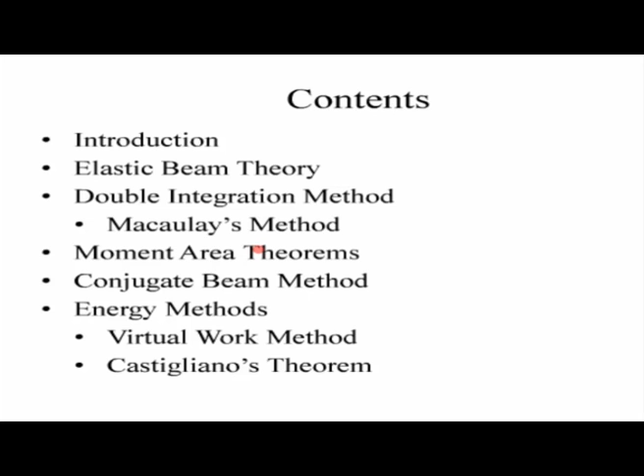Now, moving on with the introduction of this topic: why do we need to calculate structural deflections? Most often when we design structures, the first thing that comes to mind is the strength of the structure, whether it is adequate. But in addition to paying attention to strength, it is also important to calculate the deflections.

There are various reasons deflections can occur in structures. Mainly, due to loads, structures will deflect because no structure is practically or completely rigid. In addition to loads, deflections might be due to temperature changes in structural members, fabrication errors, or settlement of structural supports. These are the various reasons due to which a structure might undergo deflections.

In order to ensure that our structure is stable and the integrity of the structure is maintained, we need to be able to calculate the deflections of these structures.

There are various other reasons we need to calculate deflections of structures. A number of structural materials, such as concrete, which are mostly used for civil engineering structures, are brittle, and hence fail without giving much warning. It is therefore necessary to prevent damage to these materials, and to do that, it is also necessary to calculate the deflection of such structures.

Regarding serviceability, you need to avoid excessive deflections and vibrations in structures, because it will render the occupants or users of those structures unsafe.

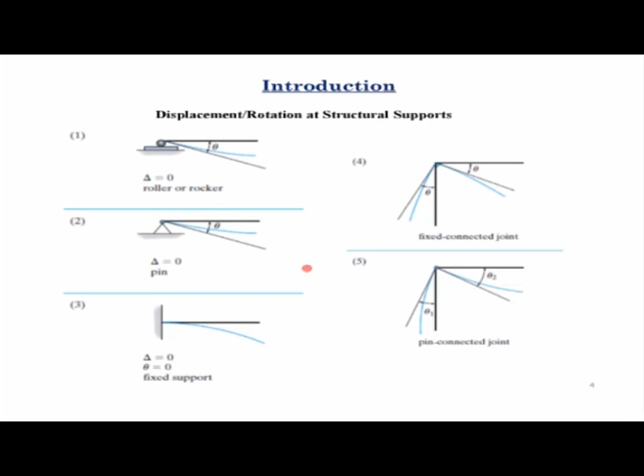Now, in order to calculate the deflections, displacements, or rotations in structures, we need to be familiar with the various kinds of supports that these structures have. Some of the typical support conditions encountered in common civil engineering structures are shown on this slide. The first one is a roller or rocker support, which restrains the movement or displacement of the structure in only one direction, perpendicular to the support.

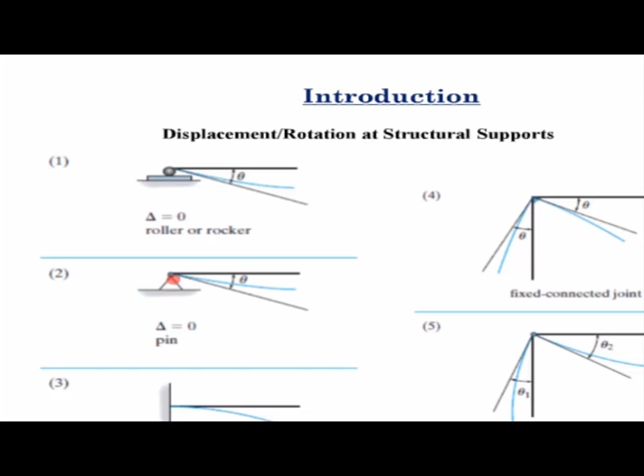The second one shown on this slide is a pin support, which restrains the displacement of the structure at that point in all three directions.

The third support condition most commonly encountered in civil engineering structures is called a fixed support, which restrains the displacement as well as rotations at those supports.

The fourth one shown here is a fixed joint connection, normally common in a frame member. In a fixed joint connection, the rotation of the two members connected at those joints are equal. In other words, displacement at those joints is allowed, but the rotations of those two members are equal. Finally, the last connection encountered in civil engineering structures are pin connected joints.

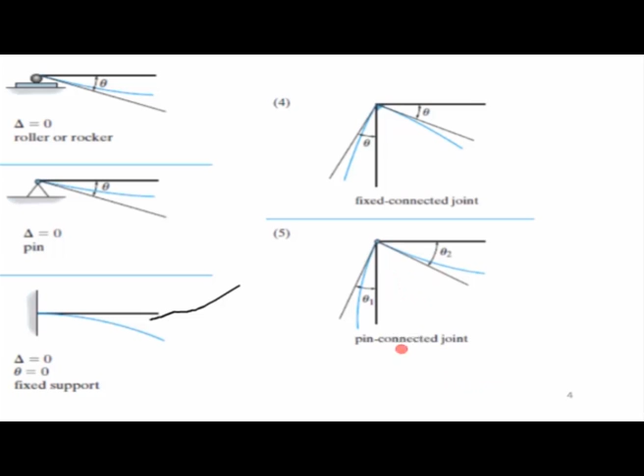In this kind of joint, the members are independent and free to move irrespective of the rotation or deformation of the other member. The two members connected are free to move by themselves.

Before I start with the first method of calculating deflection, I would like to give a small background about the elastic beam theory, based on which the first method, the double integration method, is developed. If you've taken classes on strength of materials or solid mechanics, you'll be familiar with this elastic beam theory, but I'll quickly recap.

However, it has been noticed that for members like structural beams, where the span to depth ratio is much higher - in other words, the length is much greater than the depth - the deflections are primarily caused due to the bending internal forces, or the internal bending moments.

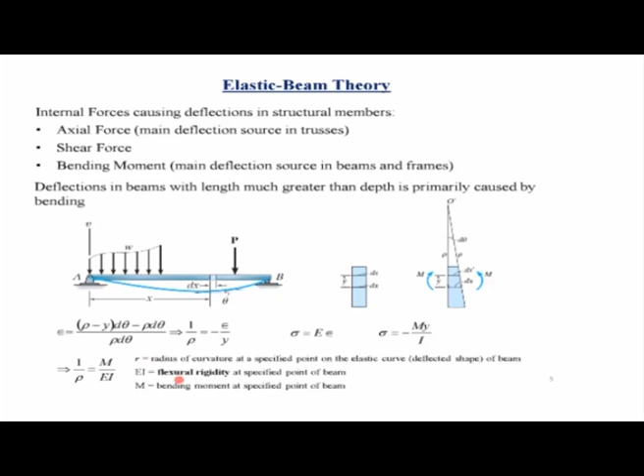Once again, if we look back at that relationship, 1 by rho is equal to m by EI. Now, this dx is the length or width of that element, and that can be written as the radius of curvature times d theta. So here we have replaced 1 by rho with d theta by dx, and taken this dx to the other side. So what you get is d theta equal to m over EI into dx.

Now if you remember from your geometry learnt in class 12, the radius of curvature is given by the second derivative of v with respect to x, over 1 plus dv/dx squared, whole to the power 3 by 2. In this study we are considering small deformations, where dv/dx is basically the rotation of the beam element. For small rotations, dv/dx squared is much less than 1, so 1 plus dv/dx squared is almost equal to 1. So we can say 1 by rho equals the second derivative of v with respect to x. Substituting this, we get m by EI is equal to that second derivative of v.

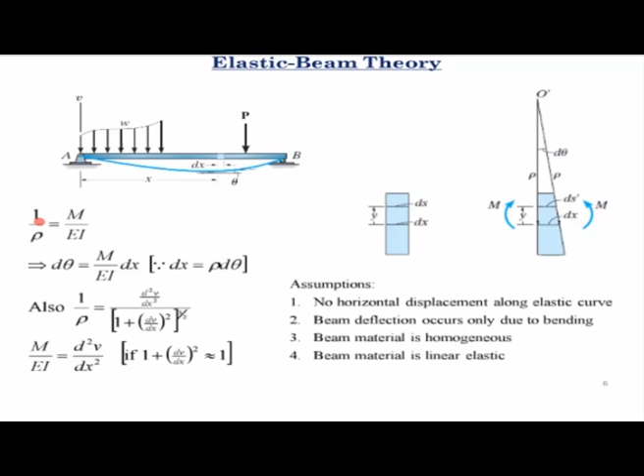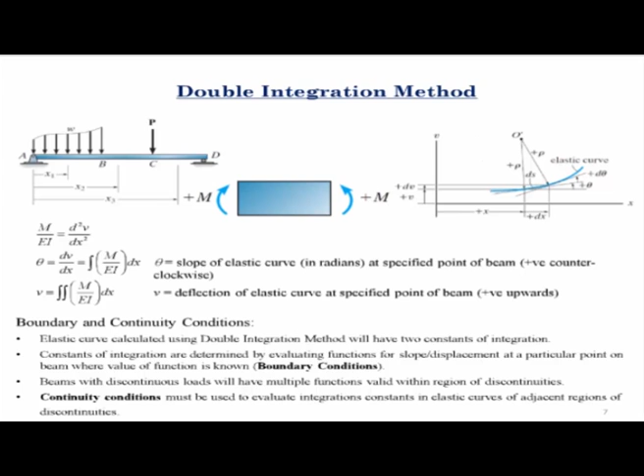So now we come to the double integration method, which is the first method for calculating deflection of structural members that I will discuss today. As I mentioned, the starting point of this method is the second order differential equation we developed in the previous slide: m by EI is equal to the second derivative of the displacement v with respect to the distance along the length of the beam.

Now if you integrate both sides of this equation, you get dv/dx is equal to the integral of m by EI, where dv/dx is the slope of the beam at any section. If you integrate both sides again, you get v, so integration of dv/dx is v, and you get the double integration of m by EI. So this is the basic principle in this method, where you integrate the m by EI function of the beam twice to get the deflection, and once to get the slope, theta, at any section.

Theta is the slope of the elastic curve of the beam at any section, and v is the deflection. Before I proceed further, I'd like to draw your attention to the sign convention that we used in this method for specifying theta and v.

For the beam, we considered the distance towards the right as the positive x direction, and the deflection in the upward direction as the positive deflection v. For the rotation, if it is counterclockwise, in other words in the positive x direction with deflection towards positive v, then that rotation is considered positive. So this is the sign convention for the positive rotation, and the vertically upward direction is the sign for the positive deflection.

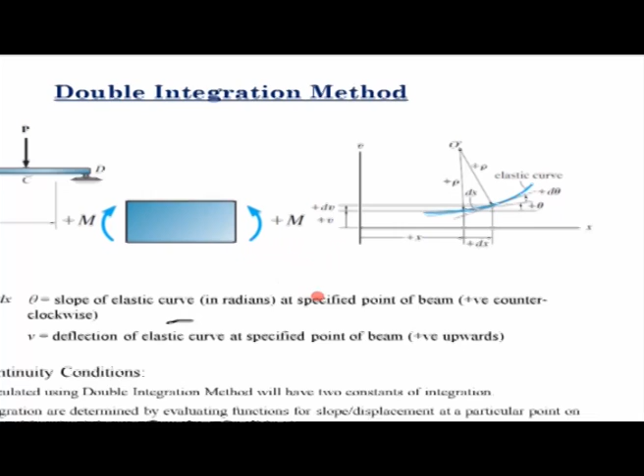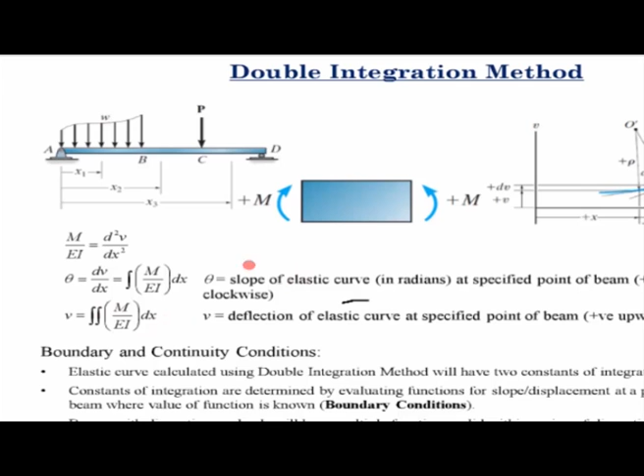Now coming back to the equation for this elastic curve, which is basically the deflected profile of the beam. We know that if we integrate this moment function of the beam, which is an expression in terms of x, where x is the distance from one end of the beam, we get some constant of integration on the right hand side. Those constants of integration have to be evaluated in order to calculate the deflection of the beam at any section, or to get the equation of that elastic curve.

So the elastic curve calculated using this double integration method will have two constants of integration. To determine these constants, we need to provide the values of either v or theta at some known points on the beam. These are known as the boundary conditions.

Beams with discontinuous loads will have multiple functions which are valid within the range of discontinuities, and continuity conditions in that case must be used to evaluate the integration constants in the elastic curves of adjacent discontinuities. I'll have two examples to show after this, and once we go through those, these four sentences would be a lot more clear.

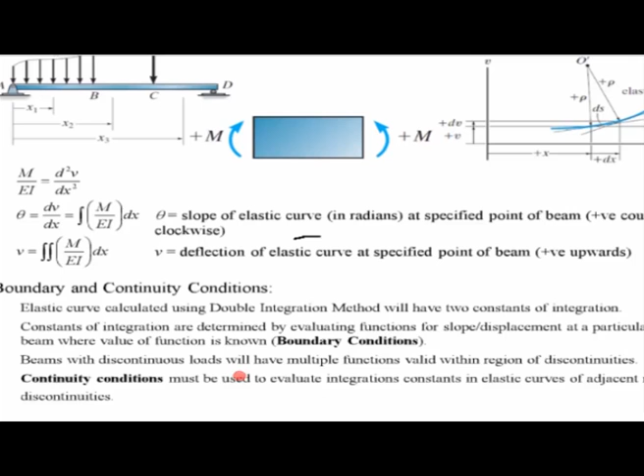This is the first example. It has a simply supported beam subjected to an external moment m0 at one of its ends. For the beam loaded as shown in the figure below, determine the equation of the elastic curve using the double integration method. Also determine the values of the maximum deflection and maximum slope of the beam, and the locations at which they occur.

One of the prerequisites for this talk was that the audience should be familiar with bending moment, shear force, and axial force diagrams of structures. So if any structure and loading is given, you should be able to draw these diagrams. We'll now go ahead with the solution of this problem.

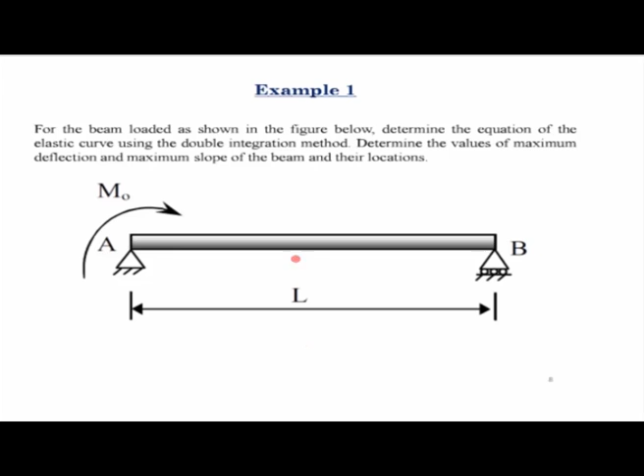If you draw the bending moment diagram of this beam, it will have a moment of m0 at end A, and at end B, which is a roller support, the moment is zero. So this is the bending moment diagram, and the moment function of the beam at a distance x from the left end is given by m0 times (1 minus x over L).

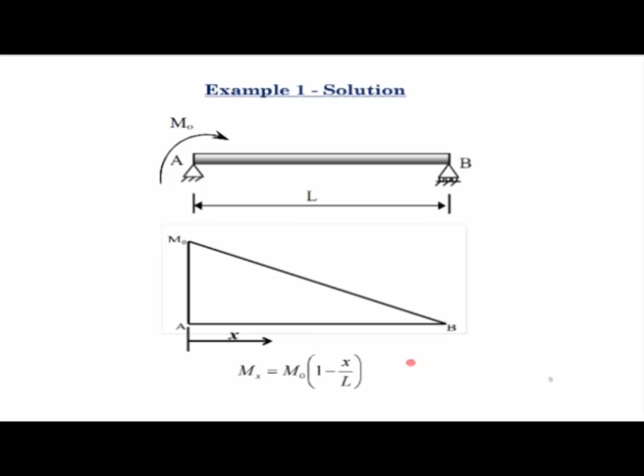To calculate the equation of the elastic curve, the displacement function at distance x, using the double integration method we write d2v/dx squared equals m/EI, and we replace m with m0(1 minus x/L). Integrating both sides, we get dv/dx on the left hand side, and on the right hand side we get (m0/EI)(x minus x squared/2L), plus a constant of integration C1.

If you integrate it one more time, you get v equals (m0/EI)(x squared/2 minus x cubed/6L) plus C1x plus C2. These are the two constants of integration that I was talking about in the previous slide. So whenever you solve for the deflection function of a beam using the double integration method, you will always encounter these constants of integration, which you have to solve using the boundary conditions.

Now for the boundary condition of this beam, it was a simply supported beam, so the deflections at both ends should be 0. So at x is equal to 0, the deflection, that is v, is equal to 0. If you put this into the last equation, putting v equal to 0 at x equal to 0, you will get C2 is equal to 0.

The second boundary condition for this beam was at the other end, end B, the deflection is 0. So at x is equal to L, v is equal to 0. If you come back to this equation, put x equal to L on the right hand side and set v equal to 0, and solve it, you will get C1 is equal to minus m0L over 3EI.

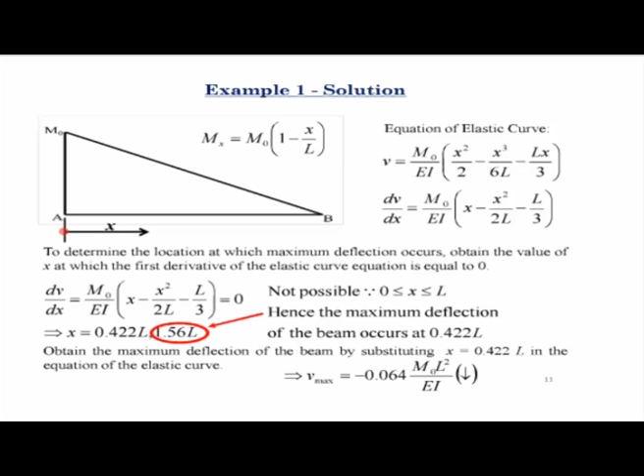So that is about the deflection, the maximum deflection of the beam. It is minus 0.064 m0 L square by EI. The minus indicates it's in the downward direction, and this maximum deflection will occur at a distance of 0.422 L from the left end of the beam.

Now for the maximum slope, what we do is we take the derivative of dv/dx, we take the double derivative, so it is d2v/dx square. If you equate that second derivative to 0, you will get x is equal to L. Now if you put x is equal to L in this equation, you get the slope is m0 L by 6 EI. So that is the slope at the beam at x equal to L.

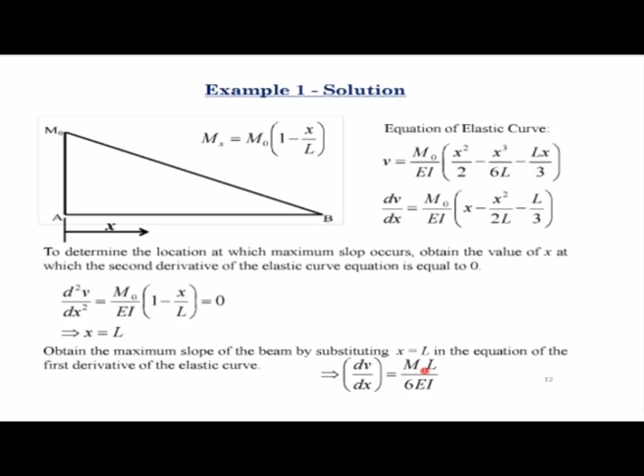But there is one thing that you should be careful about, which is one of the drawbacks of the double integration method. You cannot always take the higher order derivative, equate it to 0, and get the location of the maximum slope or deflection. In this case, what you get is a positive rotation at the right end, at x equal to L, which is m0 L by 6 EI. However, if you come back to this equation for the slope of the beam, which is dv/dx equal to...

m0 by EI times x minus x square by 2L minus L by 3. In this equation, if you put x equal to 0, that means at end A of the beam, you will see that dv/dx at x equal to 0 is minus m0 L by 3 EI.

So what does this indicate? This indicates that at this end, it is having a negative slope, meaning it is in the clockwise direction at this end. Notice that the magnitude of this slope at the left end is higher than the magnitude of the slope at the right end. So this is basically to remind you that you should always calculate the deflection at the support condition in addition to the deflections or rotations that you get from the equation of the elastic curve.

In order to calculate the maximum deflection, in addition to taking the higher order derivative equal to 0, you should also pay attention to the deflections at the supports. So in this case, the maximum rotation of the beam will be at the left end, which is minus m0 L by 3 EI, and the minus here indicates it is in the clockwise direction.

So just to stress on that point, the maximum positive slope of the beam occurs at x equal to L. However, the maximum negative slope of the beam occurs at x equal to 0, which is not obtained by equating the second derivative of the elastic curve equation to 0. In this case, the maximum absolute value of the slope is at x equal to 0. So at x equal to 0, the value of the slope is m0 L by 3 EI in the clockwise direction, and that's the maximum slope of the beam in this case.

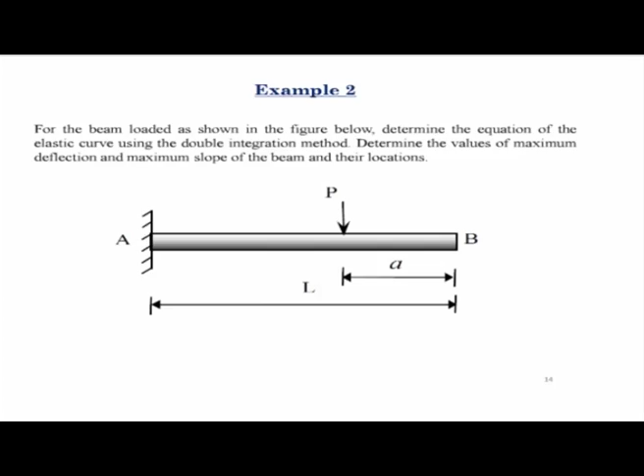Now in this case, if you draw the bending moment diagram of the beam, this is what it will look like. At the fixed end, the moment is minus P times L minus A, and at a distance of L minus A from the left end, the moment is 0, and beyond that, the moment remains constant. So this is the bending moment diagram.

So now notice that the bending moment, if you write the moment function, it will have two equations. For x between 0 to L minus A, it is minus P times L minus A minus x. And when x is greater than L minus A and less than L, the moment is equal to 0.

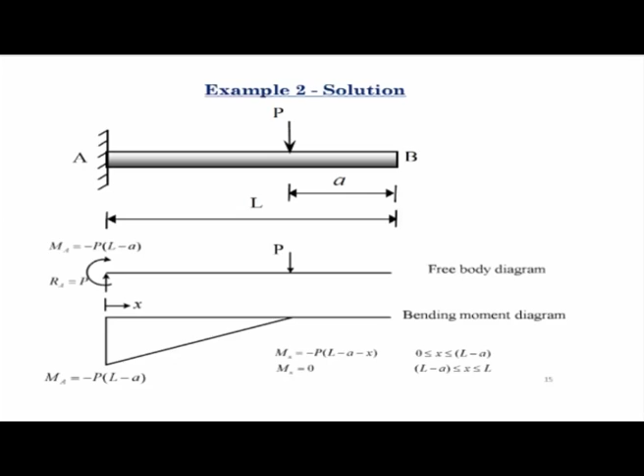Now, to solve for the elastic curve of this beam using the double integration method, there are two sets of moment functions that we have to consider. One is valid for x greater than 0 and less than L minus A, and the other one for x greater than L minus A and less than L.

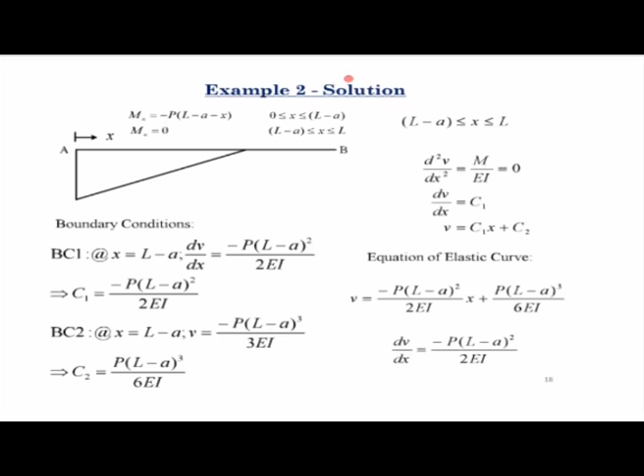In this problem we also had to calculate the maximum slope and maximum deflection of the beam. To do this, look at the expressions for slope and deflection for x between 0 and L minus A — both contain terms of x. So if x is 0, the deflection is 0 and the slope is 0.

As you keep increasing the value of x, the deflection and slope keep increasing. So this gives the maximum value of slope and deflection at x equals L minus A, from these two equations. Now coming to the other two equations...

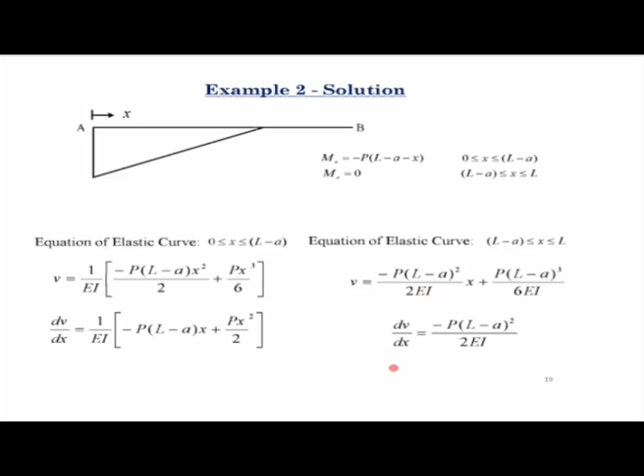So the maximum displacement and slope of the beam are obtained by putting x equal to L into those two equations. This gives the maximum slope, minus P(L minus A) squared over 2EI, and the maximum deflection, minus P(L minus A) squared over 6EI times (2L plus A). These are the maximum deflection and maximum slope at end B.

So these are the two examples that I wanted to discuss in this lecture.

Based on our observations from these two examples, I've highlighted some points about the double integration method to keep in mind. First, the double integration method can be used to directly obtain the slope and deflection at any point along the span of a beam from the equation of its elastic curve. If you have the moment function of a beam along its span, you can use it to calculate the slope or deflection at any point using this method.

However, there are some drawbacks, as I mentioned before. Beams with discontinuous loads will have separate moment functions applicable to individual regions of discontinuity. We saw in the second example that even though there was no moment function for the region between L minus A and L, we still had to consider a separate set of equations and find two separate constants of integration to get the equation of the elastic curve for the entire beam.

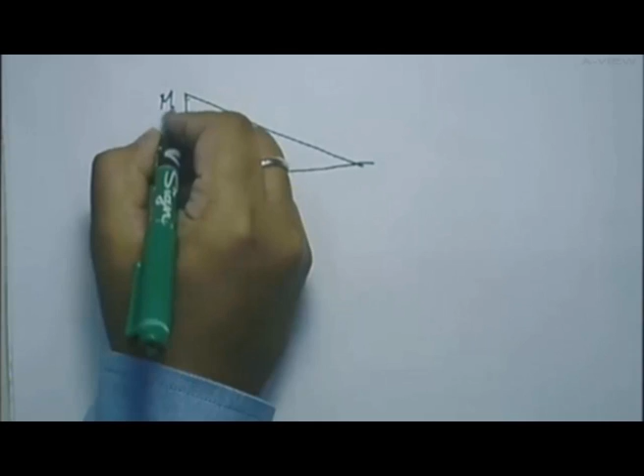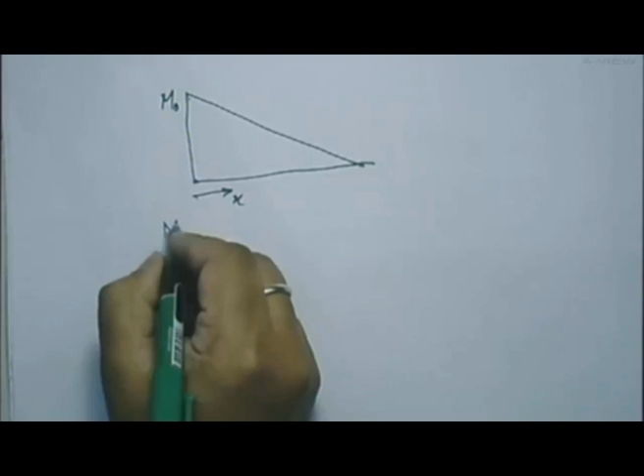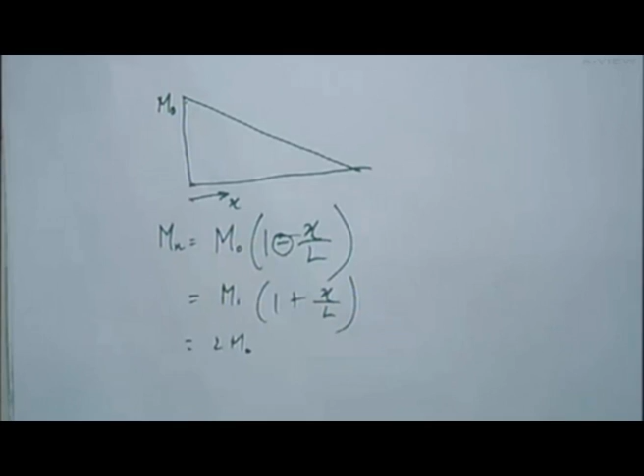Sir, in example number 1, we have mx equal to m naught times (1 minus x over L). Sir, I'm solving it and getting m naught times (1 plus x over L). Sir, why is there a minus sign? In example number 1, look at the bending moment diagram of that beam. This is the x-axis, and at x equal to 0, the value of the moment is m0, right? The equation I got is m(x) equal to m0 times (1 minus x over L). At x equal to L, the value of the moment is 0. If you put x equal to L, you get 1, so 1 minus 1 makes it equal to 0. Now if you say it is m0 times (1 plus x over L), then at x equal to L you would get 2m0, which is wrong since the moment is reducing to zero, it's a negative, so that's why you should have the negative sign there. Is that clear? Yes sir, I got the answer. Thank you, sir.

I got another question through the chat asking why we assume the beam is linearly elastic. The reason is that if we do not assume the beam to be linearly elastic, then in the equation d2v/dx square equal to m over EI, the E term is not a constant. So the equation we are using as the basis of our method would not be applicable. That is the main reason this method is applicable for linearly elastic materials or beams which are linearly elastic.

There's another question asking how to find slope and deflection for continuous beams. Before I started this lecture today, I mentioned this method is for statically determinate beams. So if you have a continuous beam which is statically determinate, and there is a support somewhere in between the span, you basically apply the support conditions at that point into the equation of the elastic curve to evaluate the constant of integration. So wherever the boundary condition is imposed, you apply it into the equation of the elastic curve, and you should be able to solve for the deflection and slope of that beam even though it is continuous.

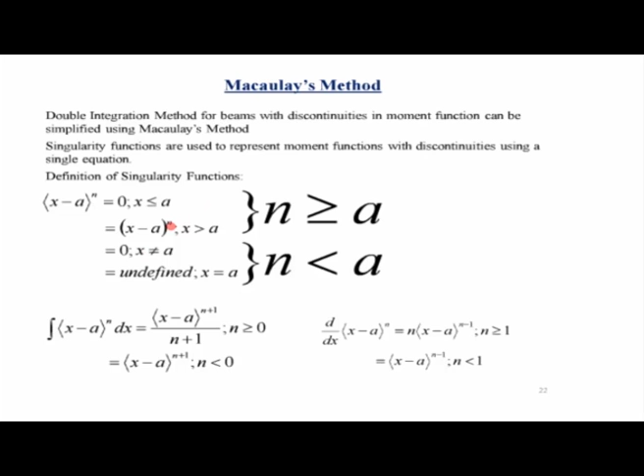We'll see the advantage of these properties of the singularity functions very quickly when we go through the example on the next slide. So this is the basic principle of Macaulay's method, where you apply the singularity function to represent the moment function of beams with discontinuous loadings by a single equation. Instead of using separate equations for each region having continuous loading, we'll use these singularity functions to represent the equations of the beam by a single equation.

So as an example for this method, I have taken this beam. If you look at this, you can see that it is supported here at A and D. So this is a free body diagram of the beam, and it has a concentrated load at this point B, and a uniform load of 450 Newtons per meter between points C and D.

Now, for your convenience, I have calculated the reactions. I'm sure that with simple equations of statics, you should be able to arrive at these reactions. That is, at the left end, the reaction is 480 newtons, and at the right end, the reaction is 920 newtons. Now, if you want to write the moment function for these beams, they have load discontinuities at point B and C.

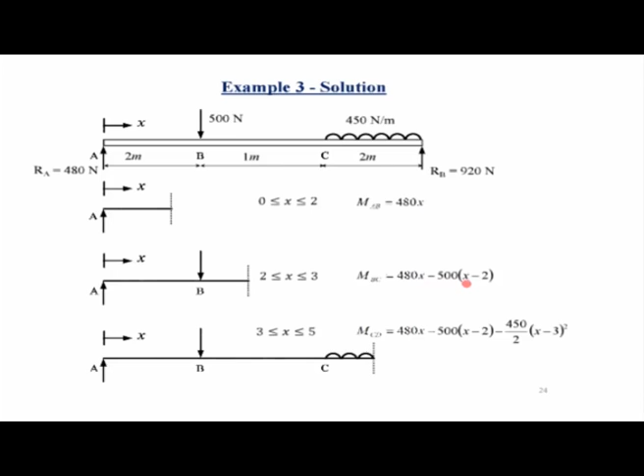So what happens is between A and B, there is one equation for the moment function. For x between 0 to 2 meters, the moment function is given by this reaction 480 times x. For this region between B and C, that is for x greater than 2 and less than 3, the moment function is given as 480x minus 500 times x minus 2. So that concentrated load, which is at a distance of 2, it comes into the picture here for the moment equation between B and C.

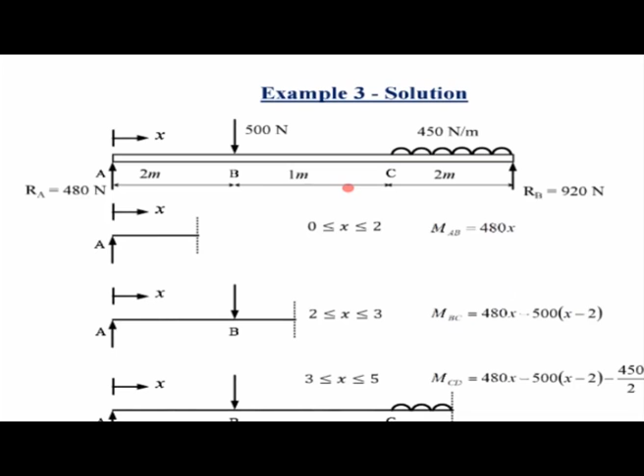Now, if you look at the third region, that is between C and D, the moment function is given as 480x minus 500 times x minus 2, minus 450 by 2 times x minus 3 whole square. So now in this region, even the uniformly distributed load of 450 Newton per meter comes into the picture.

So now you see that if you want to solve this by the regular double integration method, you will have 3 different sets of moment equations. You will have 6 constants of integration that you have to evaluate in order to be able to obtain the elastic curve of this beam. So now what we'll do is we'll see how we can solve it much easily using the step or singularity functions by the Macaulay's method. Yeah, this is the equation of that beam.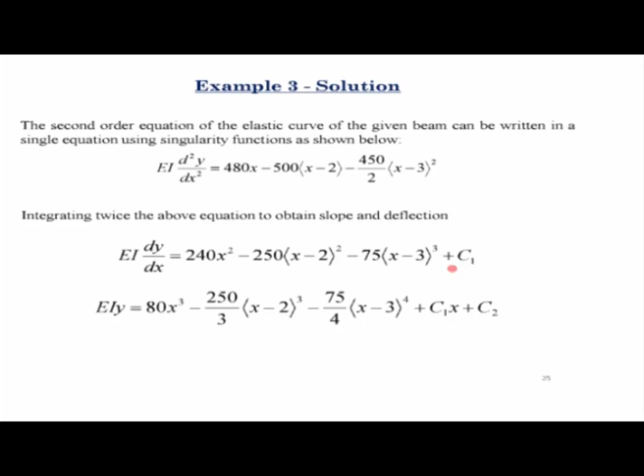So now what we have to do is solve for these constants of integration. So if you solve for this constant of integration, we'll have to look at the boundary conditions. Now this beam had restraints at the two ends.

So we say that at those two ends, the deflection is 0. So at x equal to 0, the deflection is 0. So if you put x equal to 0 on the right hand side here, all these terms will become 0, and put v equal to 0 here, you get C2 is equal to 0.

The second condition is at x is equal to L, in this case L is 5 meters, v is equal to 0. So put x equal to 5 here, so it will be 80 times 5 cube. Now here if you put 5, 5 is greater than 2, so this term will be present. So it will be 250 by 3, 5 minus 2 whole cube. Again here 5 is greater than 3, so it will be 75 by 4, 5 minus 3 whole to the power 4, plus C1 into 5, and C2 we got it as 0 here.

That will give you the value of C1 as - again there is a mistake here, it is minus 1490. So the value of this constant is minus 1490. So C2 is 0 and C1 is minus 1490.

So next thing you do, just like in the double integration method, you put these values back into this equation. If you put these values back here, this is what you will get: EI dv/dx is equal to 240x square minus 250(x minus 2) whole square minus 75(x minus 3) cube. Again, these are singularity functions, just keep it in mind. Again there's a typing error here, this should be minus 1490.

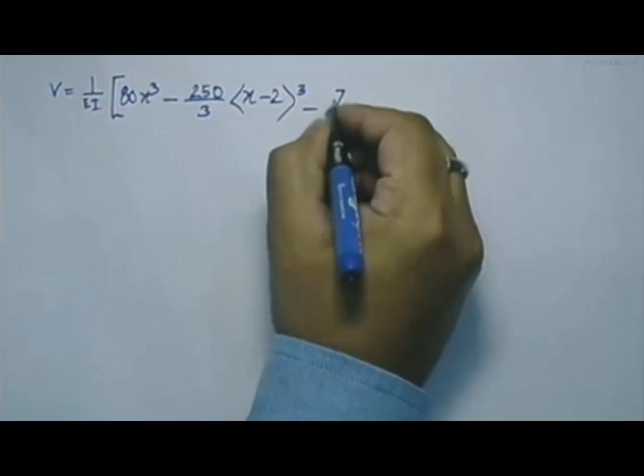80x cube minus 250 by 3, the singularity function of (x minus 2) whole cube, minus 75 by 4, singularity function of (x minus 3) to the power 4, minus 1490. So this is the equation of the elastic curve using the singularity function.

Now if I want to calculate the maximum deflection of that beam, I can say dv/dx, which is equal to 1 by EI, this will become 240x square minus 250(x minus 2) whole square minus 75... to the power... I'm sorry, there should be an x here, C1x minus 1490.

Now if you straight away equate this to 0, what happens to these singularity functions? You cannot just ignore them or take them for calculating the values of x. So what we have to do is, just like in the double integration method, separate it into 3 different regions.

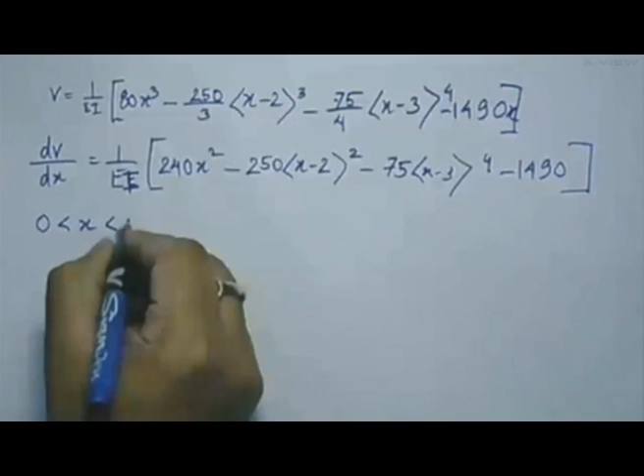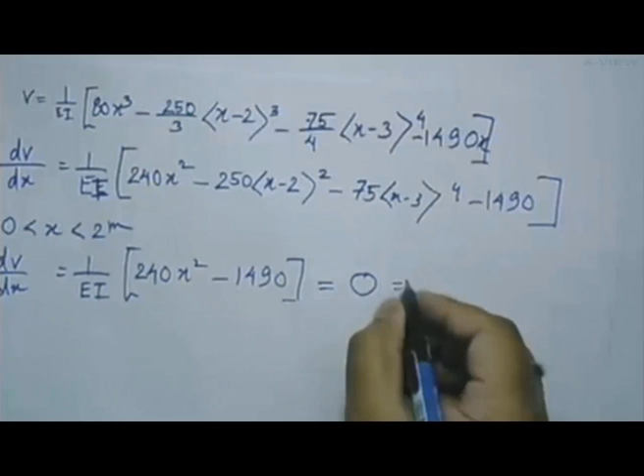So for x between 0 to 2 meters, the dv/dx will be 1 by EI times 240x square minus 1490. Now you equate this to 0 to get the location of the maximum deflection. If you equate this to 0, you will get x is equal to...

2.49 meters. Now, if you notice, this part of the equation I wrote is valid for x between 0 to 2, and by solving this, you are getting x is equal to 2.49. So it is not applicable at x is equal to 2.49. So the maximum value of the deflection cannot be obtained at x is equal to 2.49. In other words, the maximum deflection does not occur between x equal to 0 and x equal to 2. So now what we do is take the second equation.

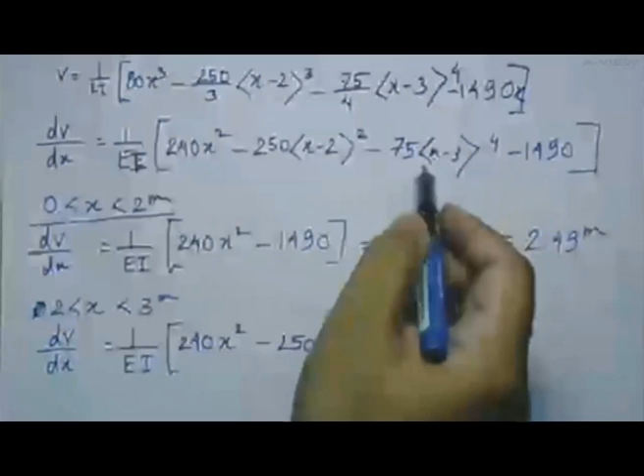So for x between 2 meters and 3 meters, dv/dx can be written as 1 by EI times 240x squared. Now the second term comes into the picture, minus 250. Since x is greater than 2, you can write it using the round bracket, so x minus 2 whole square.

Minus 1490 - this term is still not applicable, it's only applicable for x greater than 3. But right now x is between 2 and 3. Now if you put this to 0, you get a quadratic equation. If you expand the x minus 2 whole square and rewrite it, you get 1 by EI minus 10x squared plus 1000x minus 2490 equals 0. If you solve this, you end up with two values of x. This is a quadratic equation.

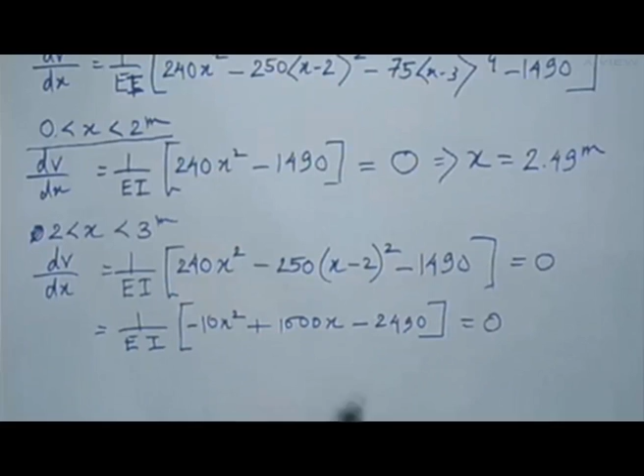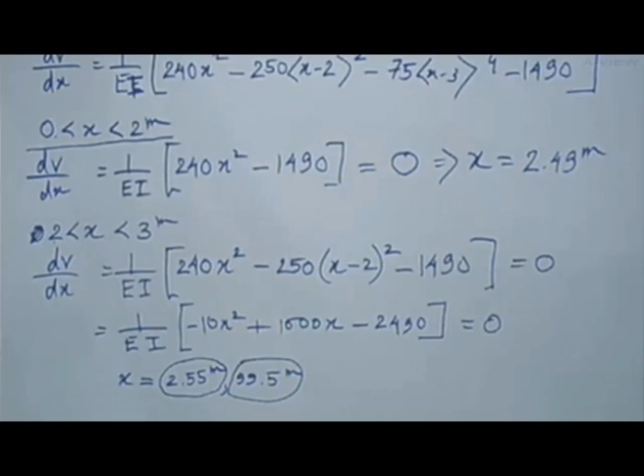I've just solved it for your convenience. So to solve this, you get x equal to 2.55 meters and 99.5 meters. Now this second value is not applicable, because for this equation the limits of application are between x equal to 2 and x equal to 3. The first solution, x equal to 2.55 meter, is between 2 and 3, so this solution of x is applicable in this equation.

So to calculate the maximum value of v, you put x equal to 2.55 meters, and solving it you end up with minus 2487 by EI. So from this you can see that this is one of the maximum values of the deflection. Now here you are getting a negative value - that tells you that the maximum deflection is in the downward direction.

Now this is the second set of equations. There will be another third set of equations valid for x greater than 3 and less than 5, and for that the equation will be dv/dx equal to 1 by EI times 240x squared minus 250 times x minus 2 whole square minus 75 times x minus 3 to the power 4, minus 1490. Notice that even this singularity function at x equal to 2 and the singularity function at x equal to 3, both of them come into the equation and both have been replaced by round brackets.

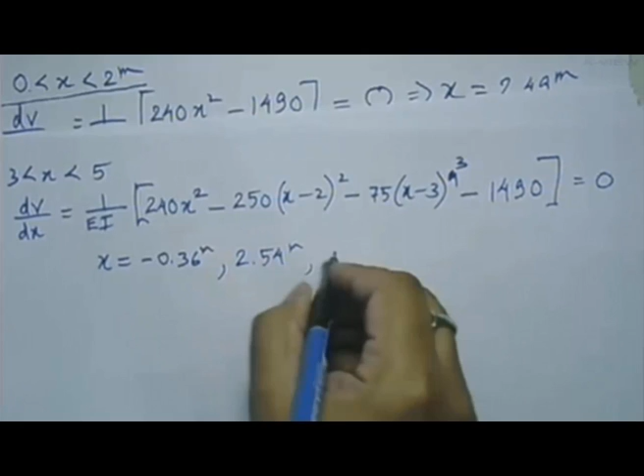So if you equate this to 0, this is a cubic equation. So if you solve this, you will get three values of x. The values you get are minus 0.36 meters, 2.54 meters, and 6.68 meters.

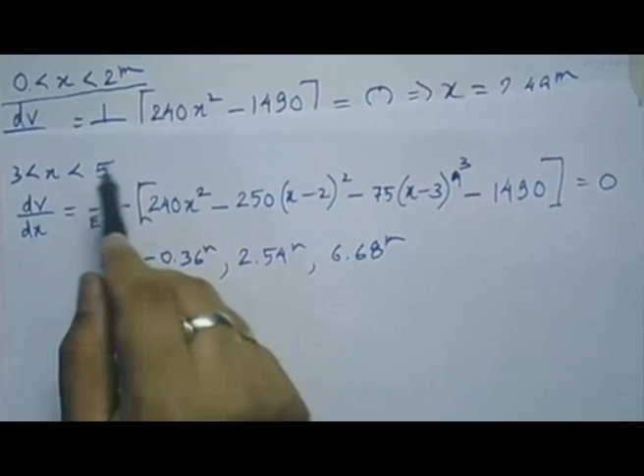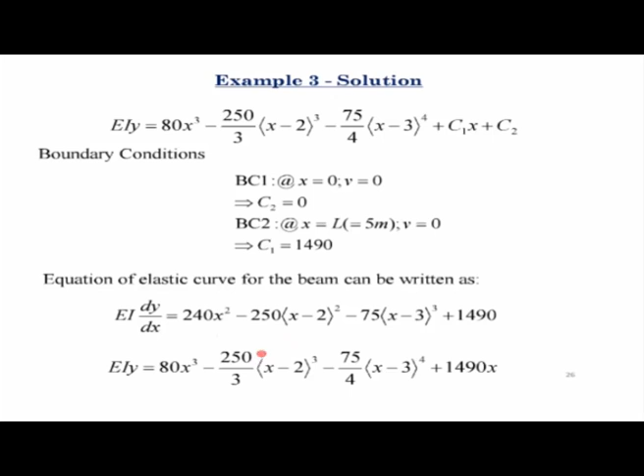So this is one example that I wanted to discuss with you all, to show some of the limitations. Even if you are able to obtain the equation of the elastic curve - that is the slope equation and the deflection equation - by solving a single equation, if you have to calculate the maximum slope or maximum deflection of the beam using this method, you will have to again consider separate equations applicable for each region of continuous loading, just like you do in the double integration method.

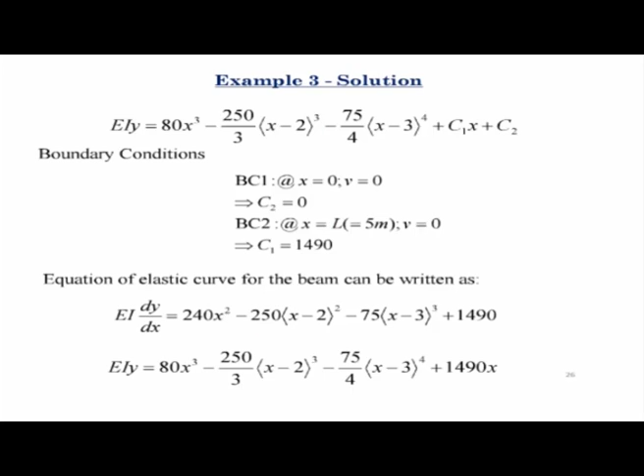So these are some of the highlights of Macaulay's method. First of all, it is used to directly obtain the equation of the elastic curve of a beam with discontinuous loads, using a single moment equation with singularity functions. Just like in example 3, if you had solved it using direct integration, you would have solved 3 different sets of equations and 6 constants of integration. But using Macaulay's method, you only had to solve one equation and 2 constants of integration. So it is definitely more convenient for calculating slope or deflection at any point over the span of a beam with discontinuous loads.

However, evaluation of maximum slope or deflection from the equation of the elastic curve requires consideration of separate equations without singularity functions. So as I showed in that example, to calculate the maximum deflection of the beam, you again have to consider 3 separate regions: one for x between 0 to 2, the other between 2 to 3, and the last one for 3 to 5.

Now again, just like the double integration method, this is not applicable for calculating slope or deflection of beams with complicated loading and support conditions, and also it is not applicable for members having significant deformations due to axial and shear forces. So that is all I had to present about Macaulay's method.

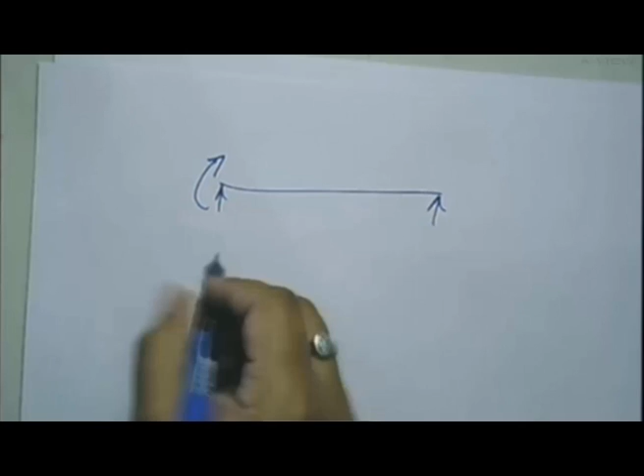a moment acting at the support. So if you draw the moment diagram of that beam, the moment function is continuous. There is no discontinuity. So in this case, I would say you don't even need Macaulay's method if I'm getting the question right. You just find the moment function or the moment equation over the length of the beam and then directly use it in the double integration method. You don't need to use Macaulay's method for this beam.

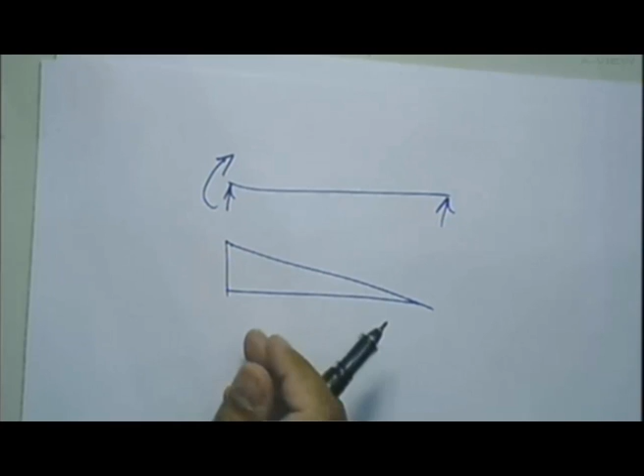Okay, the next question I got is, why can Macaulay's method not be used for member deformation due to axial force and shear load? Now, the basic principle behind Macaulay's method or the double integration method is the elastic beam theory, which basically considers the deformation of members due to bending moment, and does not consider the deformation of members due to axial force and shear load. So that is the reason why Macaulay's method or double integration method cannot be used for calculating member deformation due to axial load and shear forces.

The next question I have is, can we predict directly the approximate place of maximum deflection without undergoing all those individual sections? I'm not sure if you're asking about the example that I have discussed.

If it is about example 3 that I was talking about, yes, we can look at the beam and definitely say that the maximum deflection would be somewhere near that concentrated load. But to find the exact location and value of that maximum deflection, we need to go through the exercise where you take the first derivative, equate it to 0, find the location, and put it back into the equation of the elastic curve to get the maximum deflection.

How do you calculate the deflection and slope using Macaulay's method for a uniformly varying load? If you write the moment function of a beam with a uniformly varying load, you'll notice there is actually no discontinuity in the moment function. So basically, you do not need to use Macaulay's method for solving such a beam.

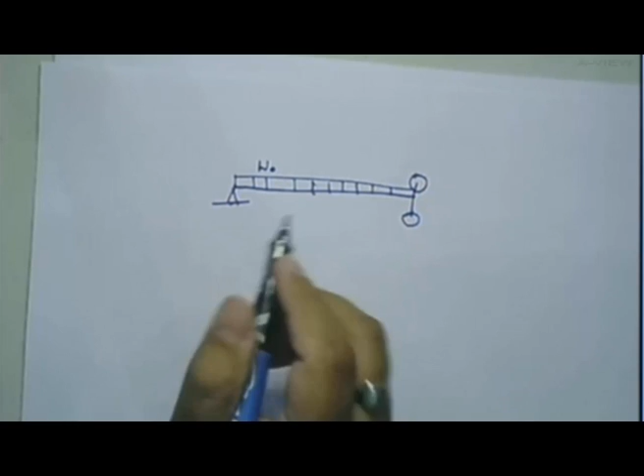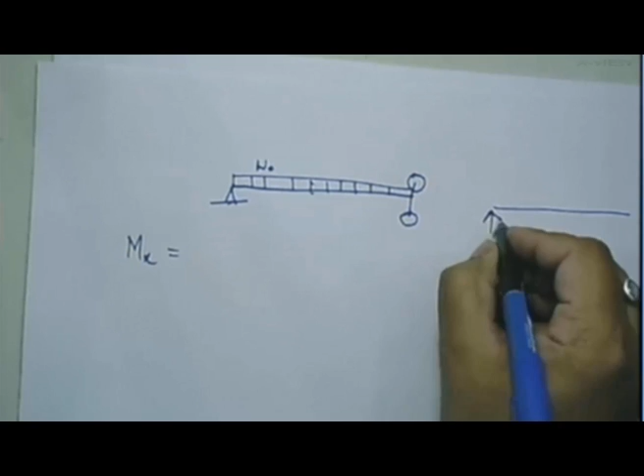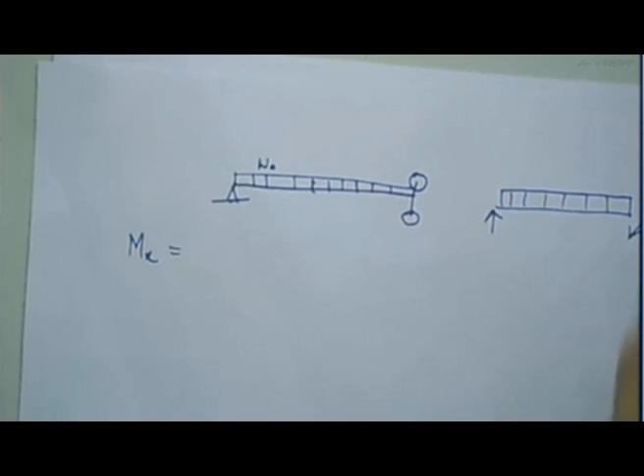So if you write the equation of the moment function, the first thing is to find the moment function. In order to do that, you should first draw the free body diagram. If you draw it, you'll get a reaction here, and a moment. Now this is w0, and this is the length of the beam.

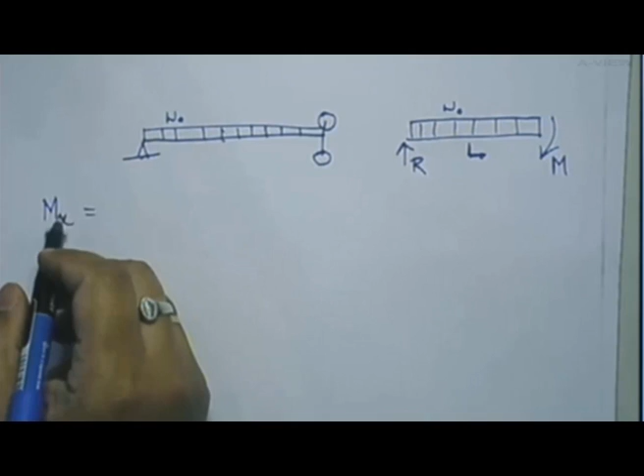So if you apply the equation of static equilibrium to this beam, saying the summation of vertical forces is equal to 0, you'll be able to solve for the reaction, which will be equal to omega 0 L, and the moment would be equal to omega 0 L square by 2.

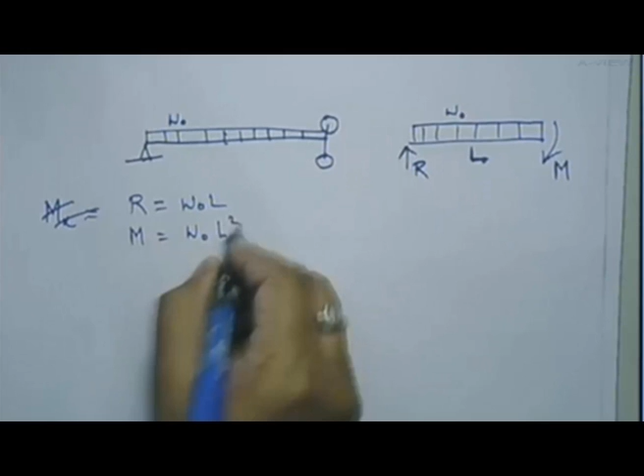Now, to solve this beam using the double integration method, you have to write the moment function. It will be R into x minus omega 0 L square, omega 0 x square by 2. So this is the moment function that you have to use.

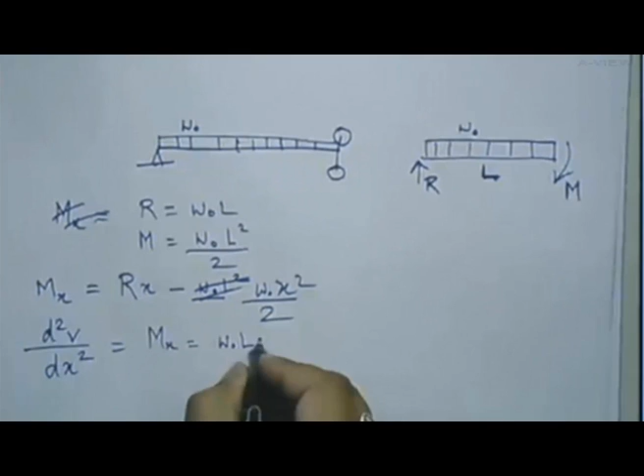Now you do the double integration, so you write d2v/dx square is equal to Mx. In this case, it is omega 0 L x minus omega 0 x square by 2. Now you can use the double integration method to get the expression—and what we've missed here is 1 by EI.

If you solve for this, you will get some expression in x, and you will get two constants of integration, C1 and C2. Now, how do you solve for C1 and C2?

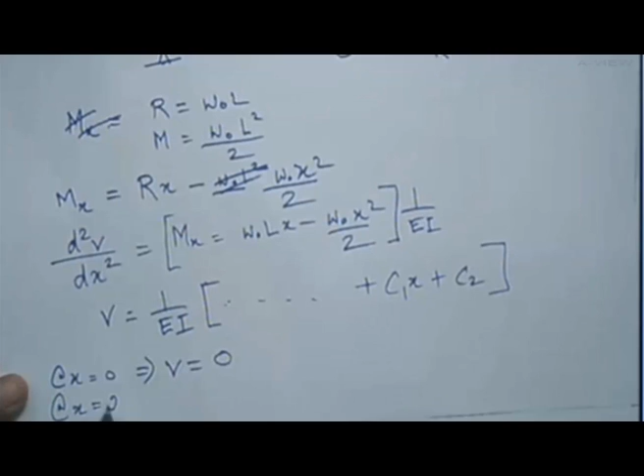What are the boundary conditions in this beam? In this beam, the boundary condition would be: at x equal to 0, V is equal to 0, because it's a roller support at the left end. And the second boundary condition would be at x equal to L, the slope of the beam would be 0.

If you look at this beam, here it can move vertically, but it is fixed into this rod. So because of that, it will not have any rotation at this end. So dV/dx is equal to 0.

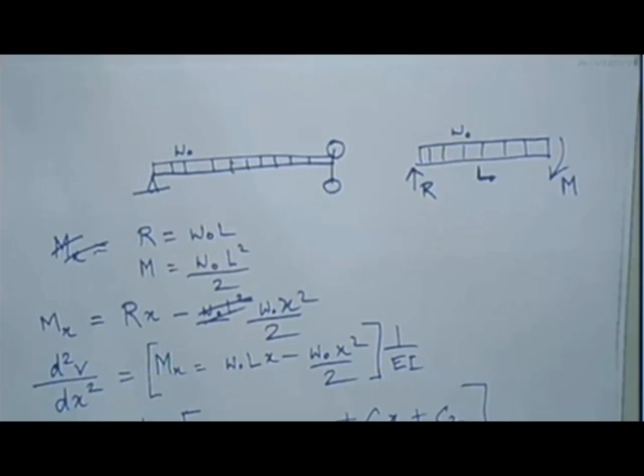Once you have these two boundary conditions, you apply them into the equation of the elastic curve, you will be able to calculate these two constants of integration, and thereby you will be able to get the equation of the elastic curve. So this is the first problem of the assignment.

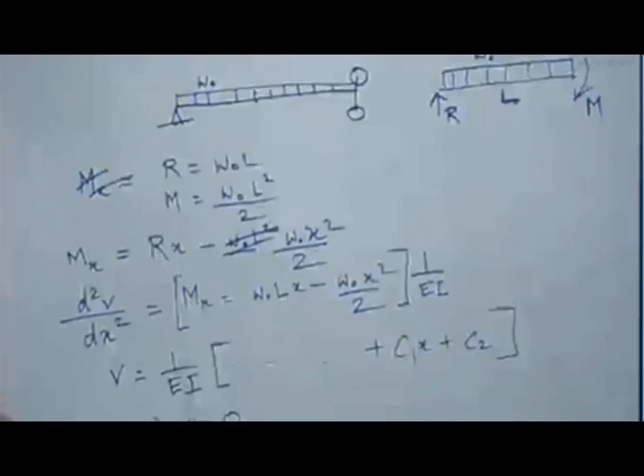So that was the first problem that I just discussed. Now there is the second problem, if you see there in the assignment. This is also answering a question that one of you all had. Determine the deflection at midpoint of the simply supported beam using Macaulay's method.

So you have a uniformly increasing load. From 0, it goes up to W at the center of the beam, and then it is again decreasing. So the question that somebody asked me is, what do we do if we have a uniformly increasing load?

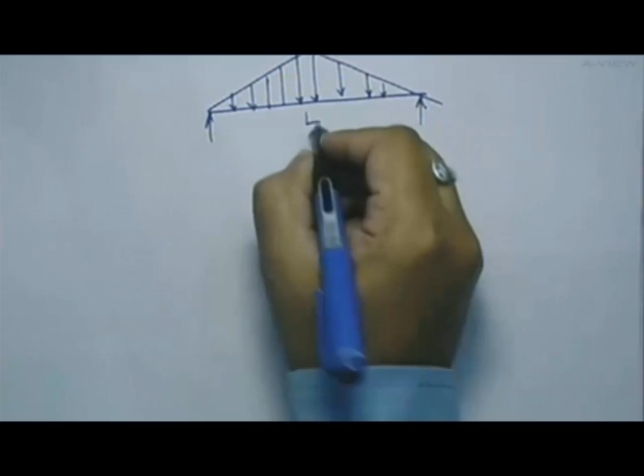So this is the uniformly increasing load. First thing you have to do is calculate the reaction. If the length is L, the total load on the beam is half omega times L. So the reaction at each of these supports would be omega L by 4.

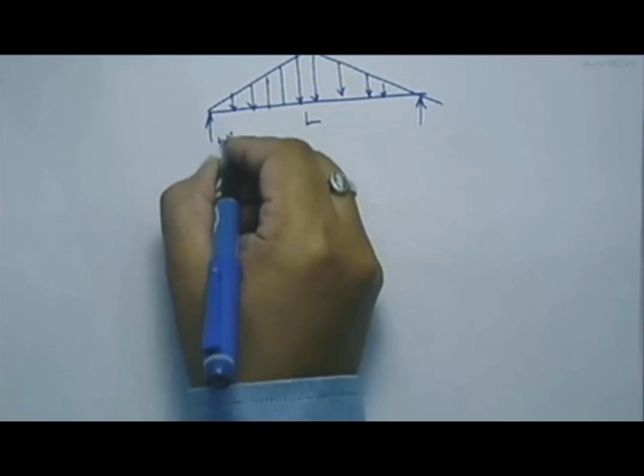To write the equation of the moment function, it will be omega L by 4 x minus omega by L by 2 into x. So that is, if you take it at a distance x, this value is omega by L by 2 into x. So this into half into x into 1/3 x. So this is the equation for x between 0 to L by 2.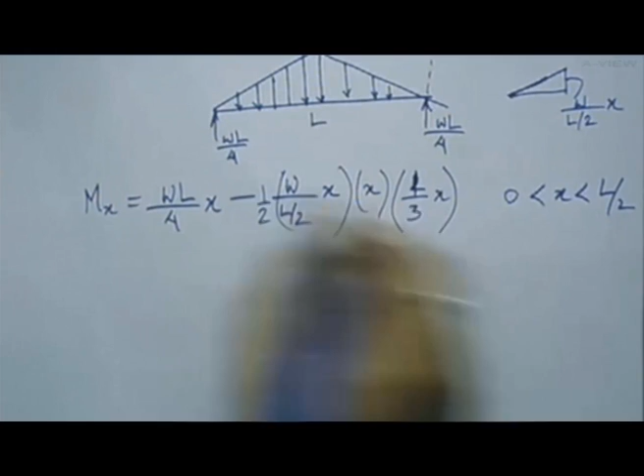Now if it has increased continuously up to the entire span of the beam, this would have been applicable for the whole beam. So that basically answers the question. If it has been a uniformly increasing load, then this equation would have been valid for the entire beam.

Now since there is a change in the slope of the loading, so from uniformly increasing, it is going to uniformly decreasing here. Because of this, we have to use Macaulay's function. Now, how do we apply Macaulay's function?

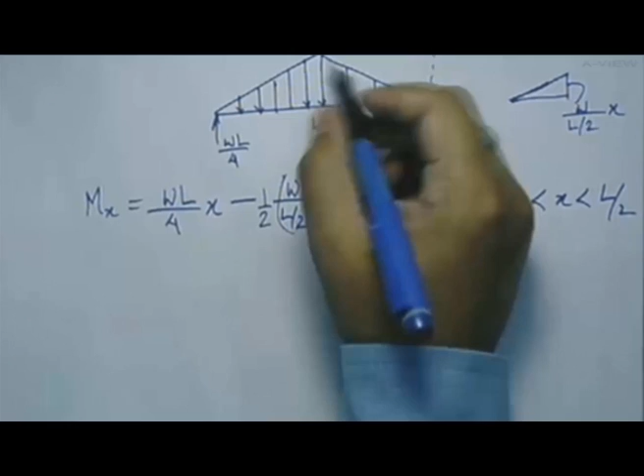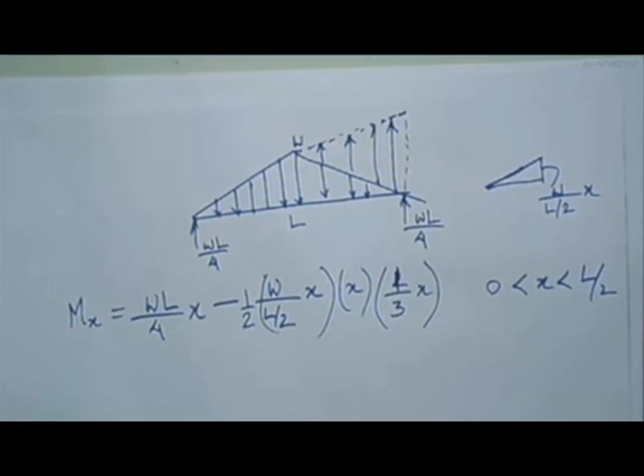What we do is, we first assume that this uniformly increasing load is over the entire span. So this equation will be applicable for the entire range of the beam. However, over this region of the beam between L by 2 and L, we assume that there is a load which is acting in the upward direction. So basically, the summation of these two loads is equal to this.

So if I draw it again, this loading can be considered to be equivalent to this loading minus, or you can say plus, and then apply this load in the upward direction. So this is L by 2, this is L by 2, and this is L. So if this is W here, at midpoint it is W, so here it is 2W. So this is also W.

So now if you want to write the moment function of this beam, what do you get? For this, there will be one reaction here, R1, this is R2. For this case, it will have reactions R1 dash, R2 dash. So the total reaction would be R1 plus R1 dash. Now that R1 plus R1 dash would be equal to the reaction due to this loading, which is omega L by 4.

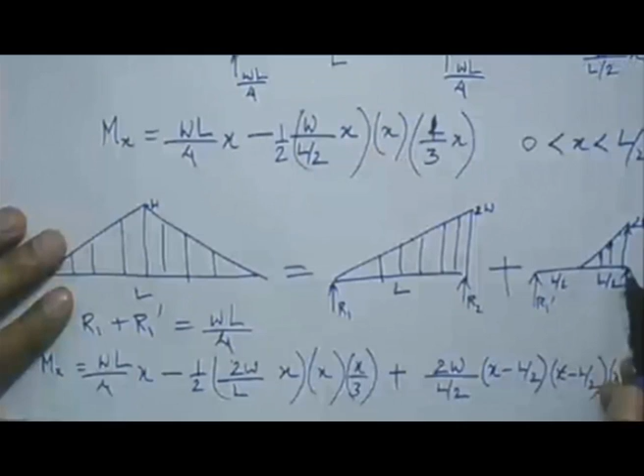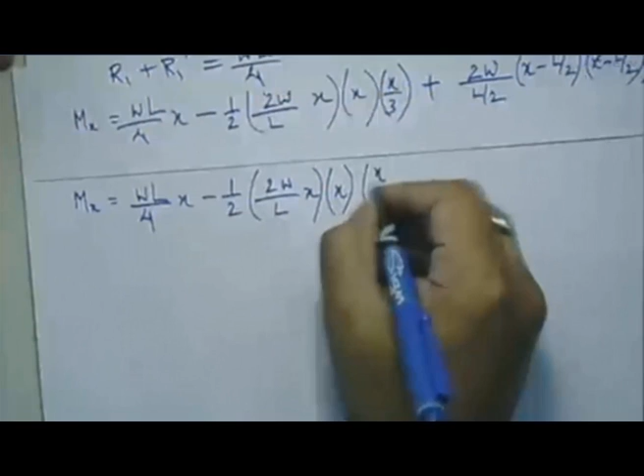Now this term is only applicable for the portion of the beam between L by 2 and L. So what we do is, you can use the singularity function for that part, which is omega L by 4 x minus half into 2 omega by L x into x by 3, plus 2 omega by L by 2 into, now this is where the singularity function is coming into the picture, cube by 3. So this is the one equation that you can use to represent the moment function of the entire beam.

Now here the discontinuity in loading is the change in the direction of increment of the uniformly varying load. Here it was increasing, here it was decreasing. Had it been increasing overall over the entire span of this beam, then you would not have needed this singularity function.

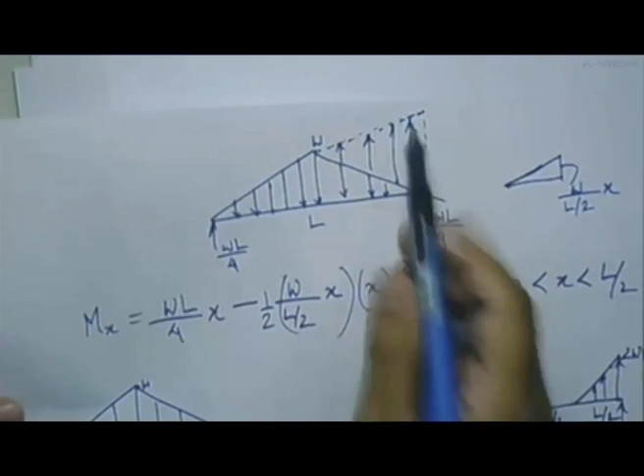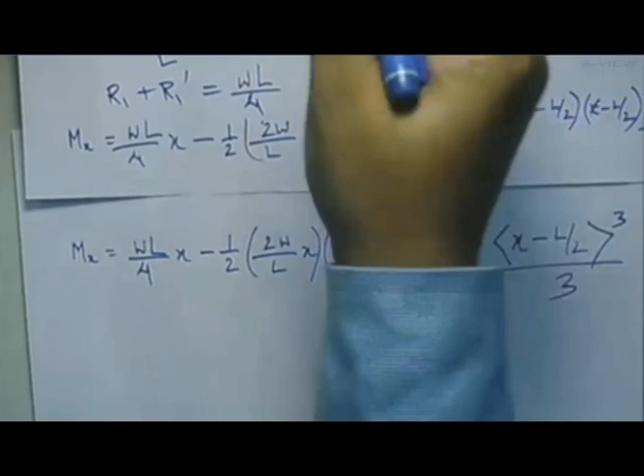Only this much, the first and the second term, would have defined the moment function of the beam. Because we have a change in the slope of the uniformly changing load of the beam, that is why we are bringing in this last term here, which has a singularity function.

So once you have the moment equation of this beam using that singularity function, and it is a single equation, the rest of the steps is similar to what I have shown. You write d2v/dx2 is equal to Mx over EI, and then you perform double integration to solve this.

Now again, if you perform double integration, you will be coming up with two constants of integration. So this will give you v equal to some expressions in x plus c1x plus c2. These are the two constants of integration, and you will again be using the boundary conditions.

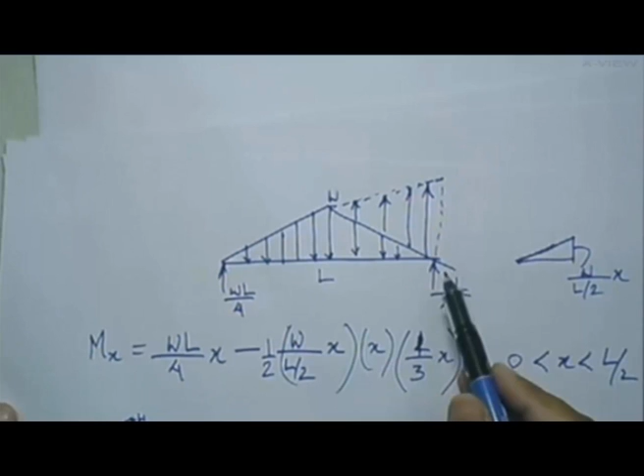So in this case, for the beam, the boundary conditions would be: at x equal to 0, the deflection v is 0, and at x equal to L, again deflection v is equal to 0. These are the two boundary conditions you will be using to solve this beam.

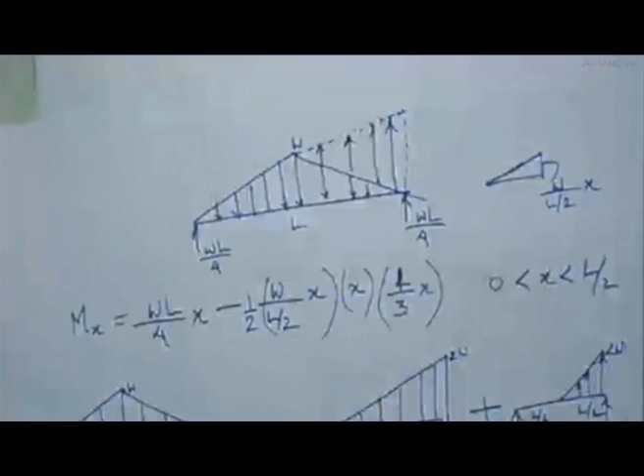So once again, since you have the moment equation using the singularity function, the rest of the procedure should be easy to solve. So once again, I encourage you to solve this assignment problem as well, which is on Macaulay's method.

These two problems, the first and the second problem that you have in the assignment, you should be able to solve after today's lecture. The first one you have to solve by the double integration method, and I have given you hints about how to solve it and what boundary conditions to use. The second one is by Macaulay's method, and once you are able to write the moment function of the beam using the singularity function, you should be able to solve it, because here the boundary conditions are also simple.

So if you have any doubts about any of these two problems, you can ask me now, and otherwise I once again request you to solve these two problems after the class today.

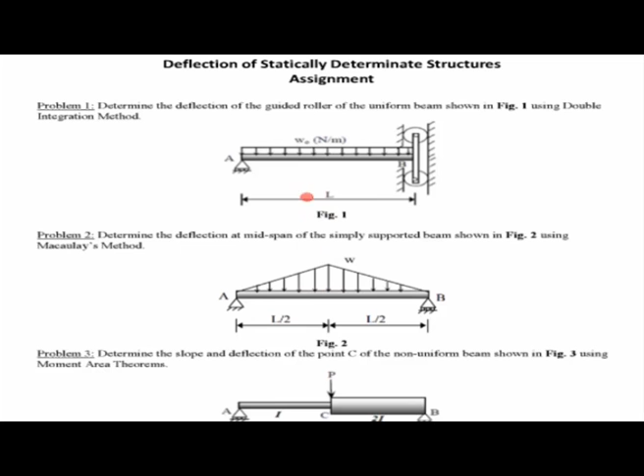Okay, I have a question. What is the problem with complicated loads and supports? What are the methods available to find deflection in complicated beams? What is the theory behind the softwares that are available to find deflections in complicated loads or beams?

Now, the first question is, what is the problem with complicated loads and supports? When I said complicated loads and supports, I basically meant beams which have loadings due to other factors like thermal loads. Because of these thermal loadings, the elastic beam theory is not applicable for these beams, so you cannot use these methods for solving beams using the elastic beam theory for complicated loads.

Now, what are the methods? The last method, that is the energy method, which I will be covering in this topic, can be used to some extent to find deflections due to these thermal loads or due to fabrication errors.

What is the theory behind softwares that are available to find deflections in complicated loads? Different commercial softwares have different theories. Energy methods is one of the theories used to solve for deflections due to thermal loadings or fabrication errors. There might be other methods which are applicable.